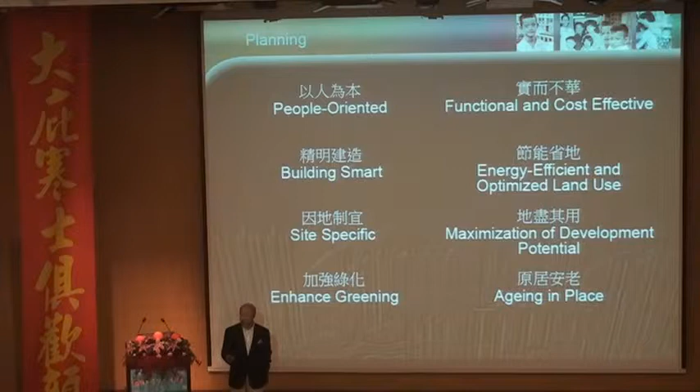Sustainability is already built into the blood since the end of the 90s. So that principle of sustainability, i.e. balancing and juggling among economic, social, and environmental, is a must. So I will try to show how we actually try to realize that. Now what I'm going to do today is these three cases.

The first is what we call the Upper Ngau Tau Kok. This is a small size public housing estate. It's only about 3.2 hectares, only 6 blocks, and then we have some welfare facilities, and a population of 12,000, 4,600 flats. Now this is basically a resettlement estate. We demolish the existing one, and then we move the people to this new area. The particular aspect of this estate is that there is a high percentage of elderly, 21%, compared with the normal estate. Therefore the plan is designed to take care of the needs of the elderly.

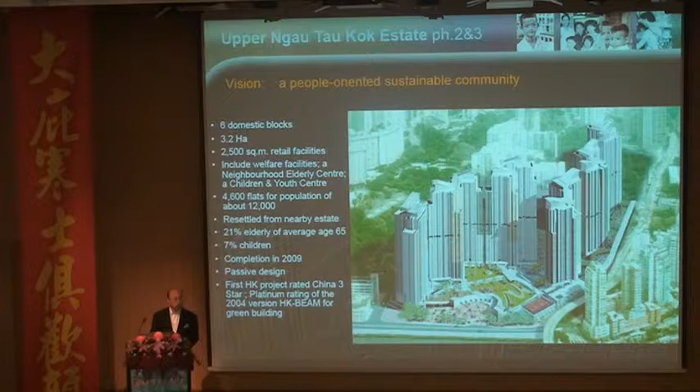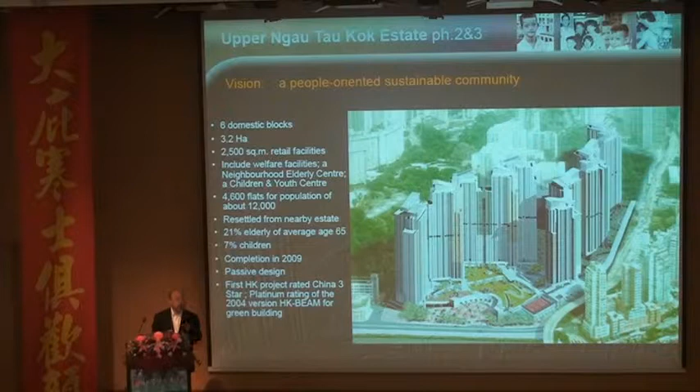And we have used extensive passive design, because you are going to design for the very low income class. You can't expect all of them to be using air conditioners all the time with all those electrical and energy consuming gadgets. So try to use passive design compared with active design. And this is one of the projects where we got the platinum rating for green building in Hong Kong. And it's the first project for the China 3 Star outside China. So it's a very high standard of green building requirement.

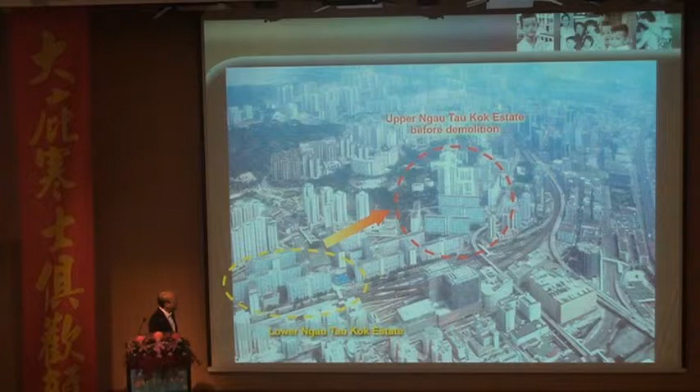Now, this is the old estate, so that you have a view of it. This is sort of like a Mark 6, built in the 60s. And the whole idea is to demolish this bit and move the people there. The whole area is a very, very high density urban situation. The concept, when we started doing this in the year 2002, is we would like to plan and design it as a sustainable community and try to revitalize the neighborhood through redevelopment. So that is the vision we would like to achieve. And there's a whole series of actions on how to achieve the sustainability.

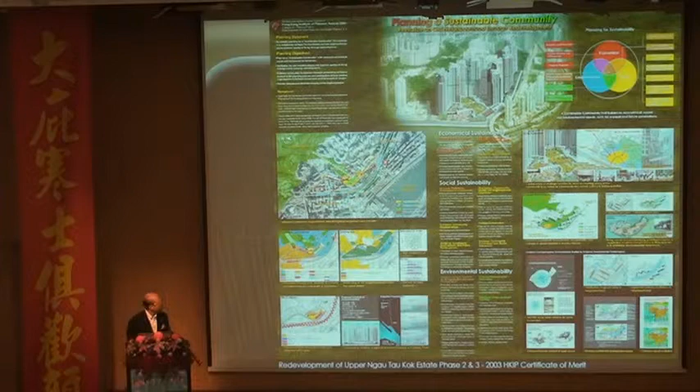Now, I will go through some of those criteria which are concerned. The main intention is to share with you what the concerns are behind the planners and the designers when they do this one. Now, the basic things like connections, linkages, connectivity, how this is going to provide the parking, how this is going to be accessed, etc. These are the MTR stations.

Now, these are the musts: sort out the circulations, segregation of pedestrian and vehicle, etc. The one I like to highlight here is that in the design, you probably notice that the center bit here is a major pedestrian and recreation area. Vehicle access is all from the back, the service access from the back, and the extent of the roads are minimized. Now that is a very key thing in estate planning. If you minimize your road, then you get more open space for the people to use.

This is a 7.5 plot ratio, very high. I can assure you, it's very high. And we are not using podium construction. In Hong Kong, we use podium construction and we can achieve very high density. No podium construction, blocks on the ground, it's going to achieve 7.5, it's very, very high. And there will be a hierarchy of spaces and all the circulation will be cross-checked so you can interlink with the nearby development and the MTR station.

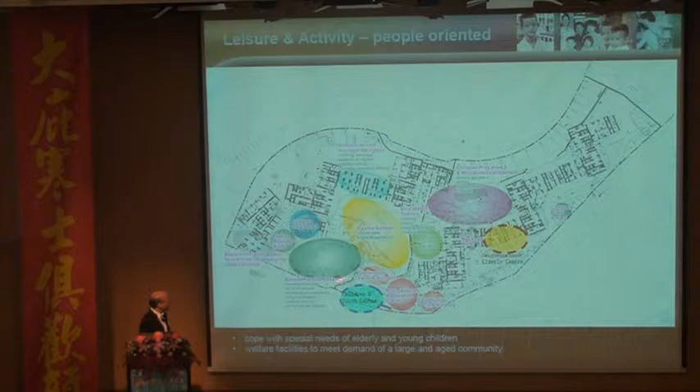These are the basics. I mentioned the hierarchy of spaces. Yes, that's very important. People are living in very small flats, very, very small flats. So the only opportunity for them to live better is to go out. So the design of public space is extremely important for high-density development. And there will be a choice of various public spaces from the more open and civic level to the less semi-public level, to children's areas, elderly's areas, exercise areas, and little pockets for various groups of people

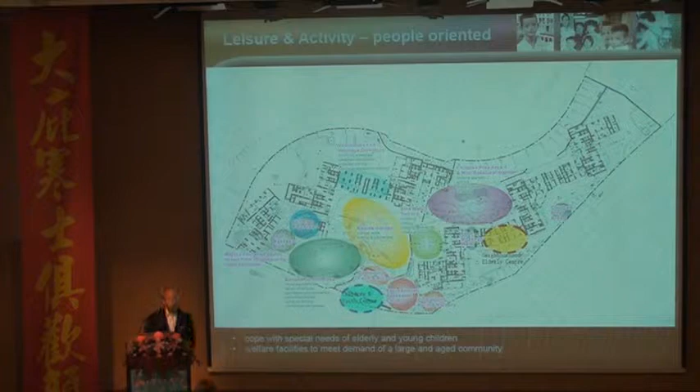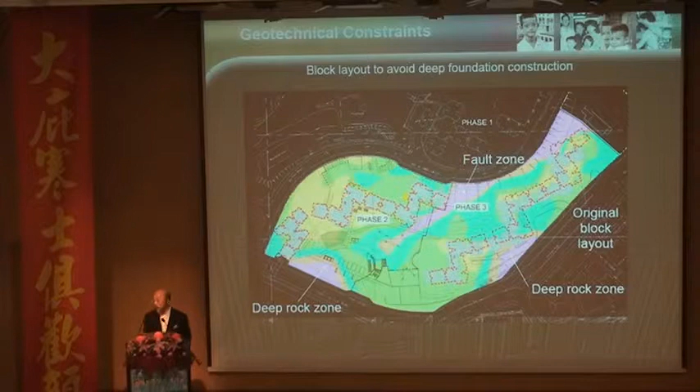This is one of the estates where we first introduced microclimate studies. That's dating back to the year 2002. And I think you recall that in 2003 we had SARS, which means that the virus spread by the air. But here we were not aware of it yet, but we knew that because of the very congested urban situation in Hong Kong, the microclimate of individual areas varies.

I don't know what is the case in Taipei. If you ask which is the direction of the prevailing wind in summer, I don't know. If someone can tell me, prevailing wind in summer. From southeast, okay. In Hong Kong, we also talk southeast, okay? Southwest. Southwest, right, doesn't matter. How about in winter? Okay, right.

Now in Hong Kong, generally, in the urban area, we say it's from the southeast. But because of topography, because of the buildings, these buildings are about 40 to 50 stories high, the local climate changes. Even in Hong Kong, these three projects, I can tell you, it's not from the southeast. So if the wind direction changes, the whole layout changes. So here we use microclimate. Microclimate is taking into account the wind direction, the sun, the traffic noise, all those environmental issues to be considered.

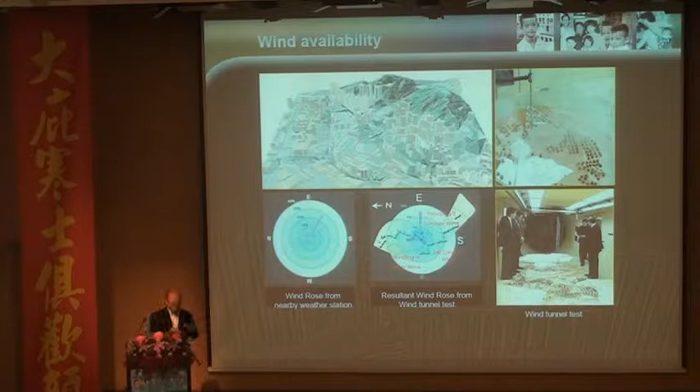So let me elaborate a little on this one. As you thought, the wind is from the southeast. Okay, that's the wind we use. But when we use the CFD simulation and the wind tunnel, we find it's not from the southeast. So immediately the layout will change. Imagine it's not from southeast but east. So that actually helps us to design according to the wind. So we use CFD, and then when we do the layout, we use the simulation to check how we could locate the blocks in such a way that we can maximize the wind.

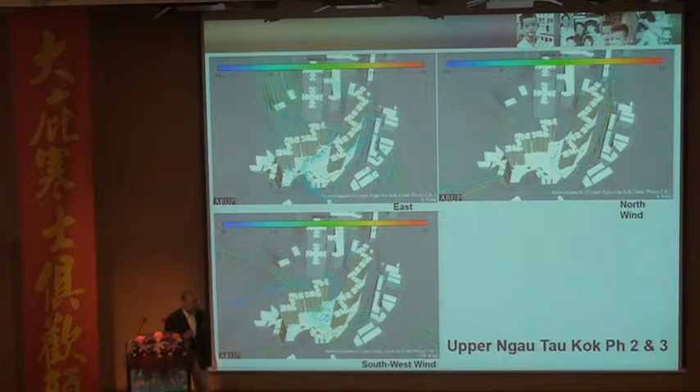In this particular case, because the wind is coming from the east, we adjust the layout of the blocks in such a way that the wind from the east is being channeled here. And then we do this 30-meter wide wind corridor, we increase the wind here. But we also know somehow the wind, like you said, is from the southwest. So if it's from the southwest, you twist this block a little bit. So if the wind is coming from the southwest, it goes in that direction and creates that wind corridor here.

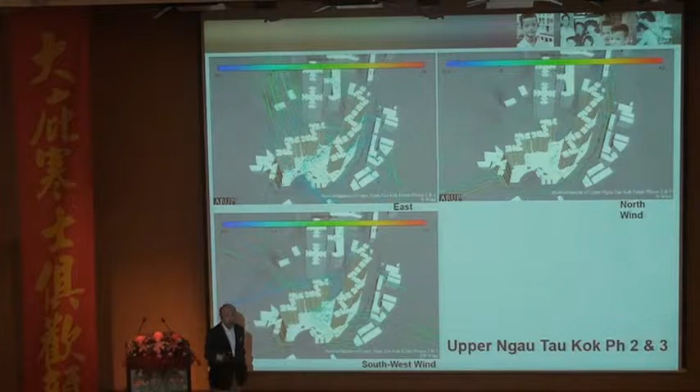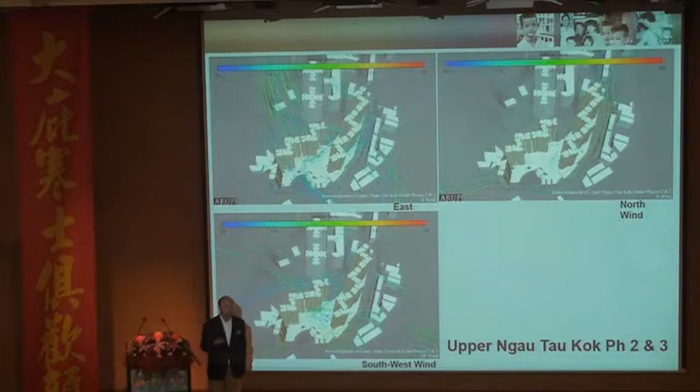And because the wind is from the southwest, this particular block is effective to get this wind going back in the other direction. So still we have cross ventilation during the southwest wind situation. And of course in the north wind situation, this is shielded from the north wind. So the major area in this case is being sheltered from the cold winter.

As you indicated here, in the past they thought the wind was coming from the southeast. But actually it's not, because it's from the east. So if you look at those old settlement blocks, this area is basically a stagnant zone - no wind, nothing you can do about it.

But since we have done this, we have created this channel here, a wind tunnel. The whole district's ventilation should be improved, and this area, which is supposed to be a stagnant zone, will be improved as well.

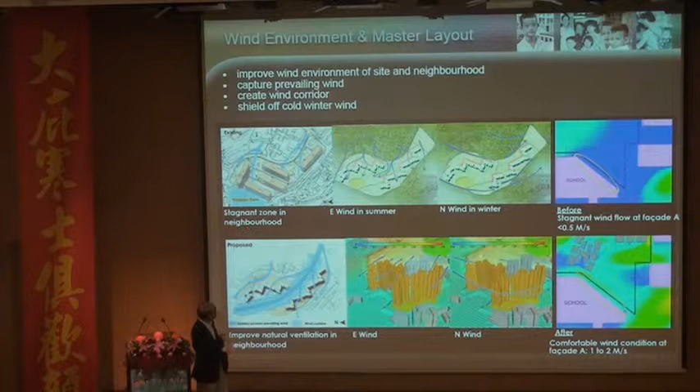So the whole idea here is that when we talk about sustainability and environment, you should not only consider your own situation, but also your neighbor's. If you build something here, I also include the environmental conditions of the neighborhood. People will welcome this, because if you don't do this, people here will block the wall - just imagine the implication of that. That's one issue.

The other issue is about permeability. In order to make the ventilation better, you also make the block permeable. Because once you make the block permeable in South China, since it's hot and humid, just like a permeable building, you feel cool. That's why we do the same thing in buildings - we have a lot of openings so cross ventilation is created. That permeability also helps the wind condition in the nearby area. This is extremely important for providing good air conditions in the urban area.

So we have done a lot of simulation and studies. Even the block itself is ventilated like this. In the old days we used to have a lot of re-entrants which were not cross ventilated, and that's why we had all these problems - all the exhaust air from the kitchen, from the toilet, from the re-entrant, hoping Mother Nature would deal with it. The fact is some of this would keep settling there, and we have all these viruses and health issues which we cannot avoid.

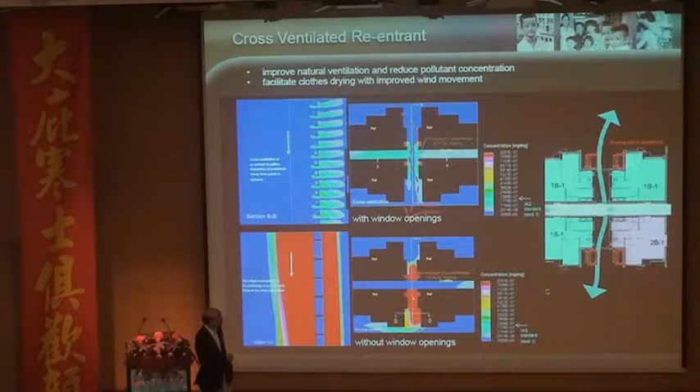The other issue - this is a quick indication of stagnation of pollutants and concentration: no ventilation versus ventilation. The whole thing can also be projected for different levels and zones showing what ventilation is provided, and how this compares between different times of the year and different humidity conditions.

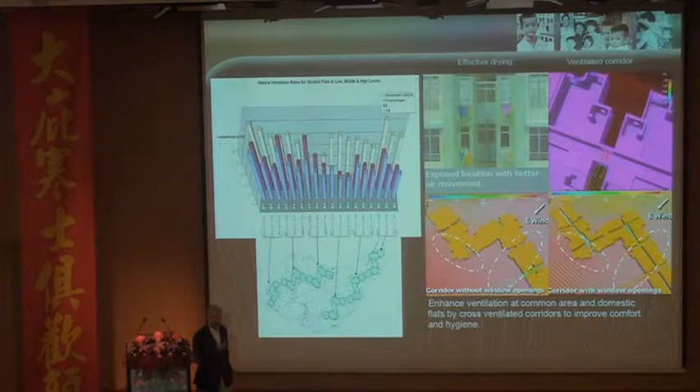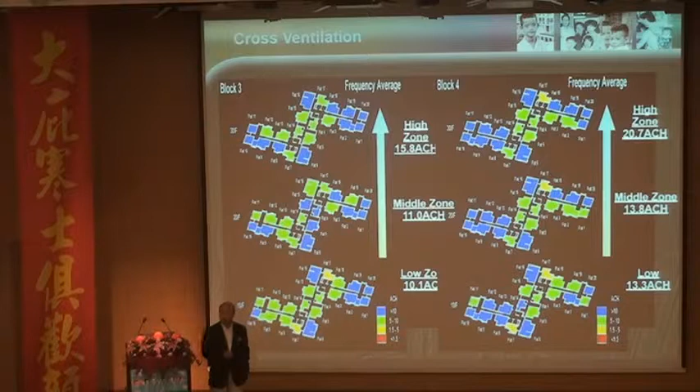This will be taken into account in the design of the block. For different zones and different units, we probably work out air change per hour. So that exercise can actually help you deal with that.

A quick note about the block - in the design of the block, this is one of those early site-specific blocks. The other day I saw this example of construction. I think Jeff mentioned the block is not very economic for construction.

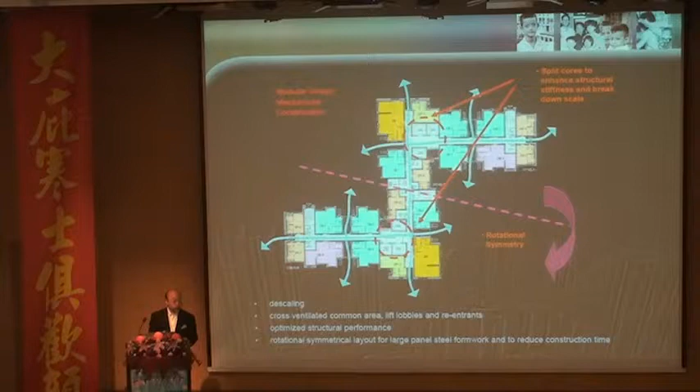The most important thing for public rental housing is three things. You've got to construct it low cost and economic. You've got to construct it very fast because people have demand for it. Third, you've got to have good quality blocks so that people respect it - okay, reasonable quality. In order to achieve that in construction, we always use this term called rotational symmetry.

This means that when the formwork of this part is completed, it will rotate to the other part to be used. So instead of 100% formwork, you do 50%, and this is very efficient construction. The ventilation mentioned will help cross ventilation inside the public space as well as the flats, and this will also give additional light to the long corridor.

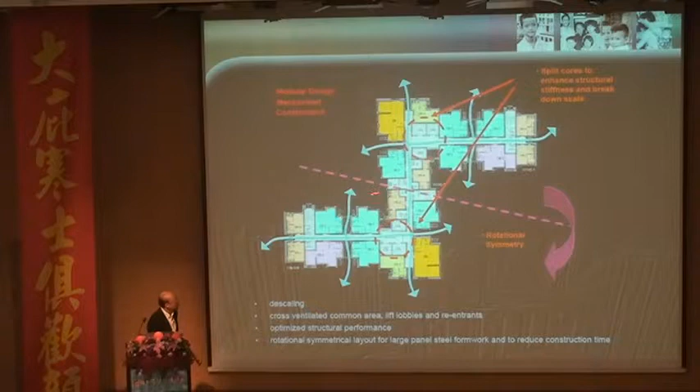This is our approach, trying to reduce the scale. If you look at the old rental harmony block, it is 20 flats per floor - that's a huge scale, too many people there. So if you chop it up into two, split the core, you have 10 flats. Compared to the private standard of 8 flats per floor, it's still a reasonable scale.

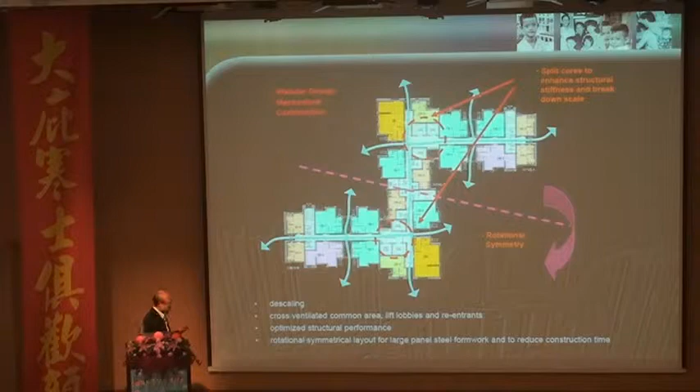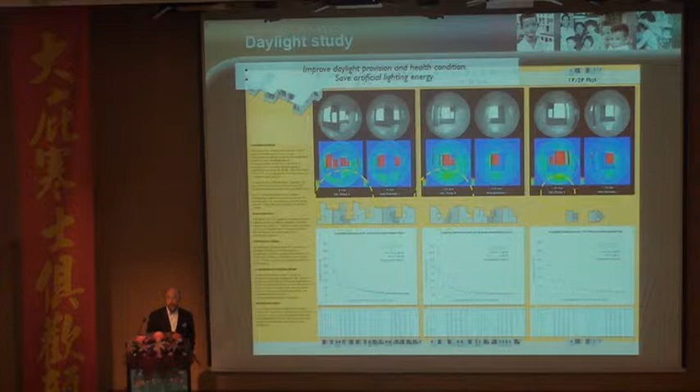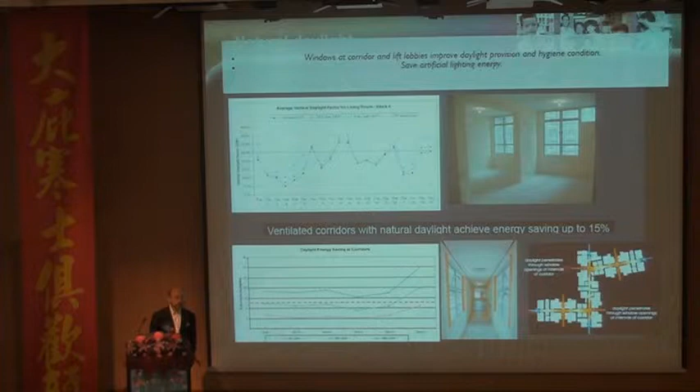The lighting - a lot of lighting studies and simulations were done so we can ensure maximum natural daylighting into the flats as well as the corridor. We did studies about this because by doing that, we reduce the use of artificial lighting, and again that helps reduce the cost. We also looked into shading studies, because this whole block will provide significant shade into the public area, and during summer, if you have shade, the usability of this area will be much better.

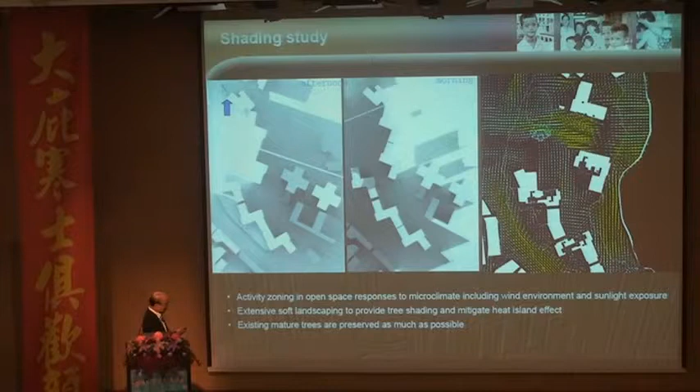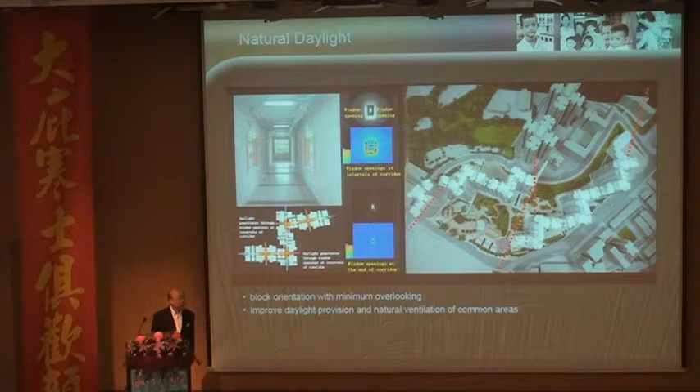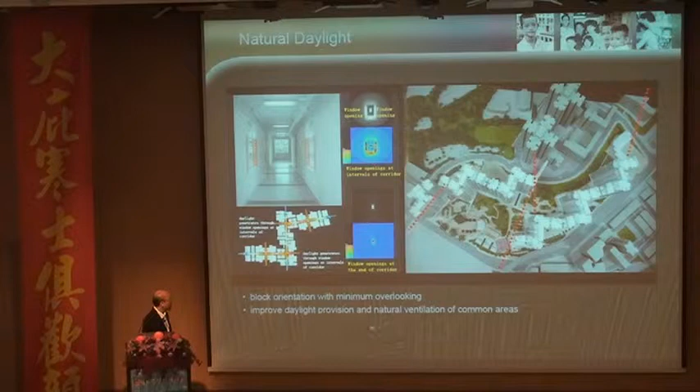Views - how are we going to design a very compact situation and also maximize the view from each of the units? There's also the reduction of glare. When we have lights, we also have the problem of glare, so we apply lighting studies.